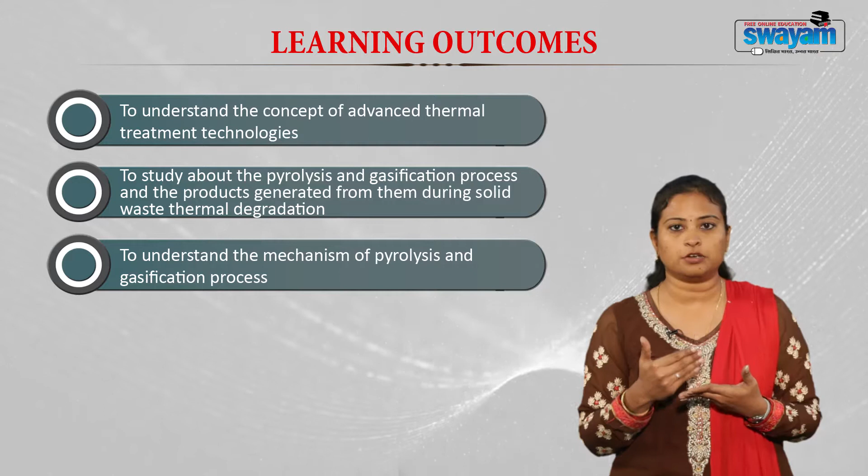We will also understand the various mechanisms of pyrolysis and gasification, study the different types of these processes and the various reactors used to perform them, and finally understand the merits and demerits of pyrolysis and gasification.

Advanced thermal treatment technologies use very high temperature to degrade or destruct waste. They are specifically designed to recover energy in the form of heat or electricity and other end products that can be used as chemical feedstock. The main purpose is to reduce the impact of residual waste on the environment.

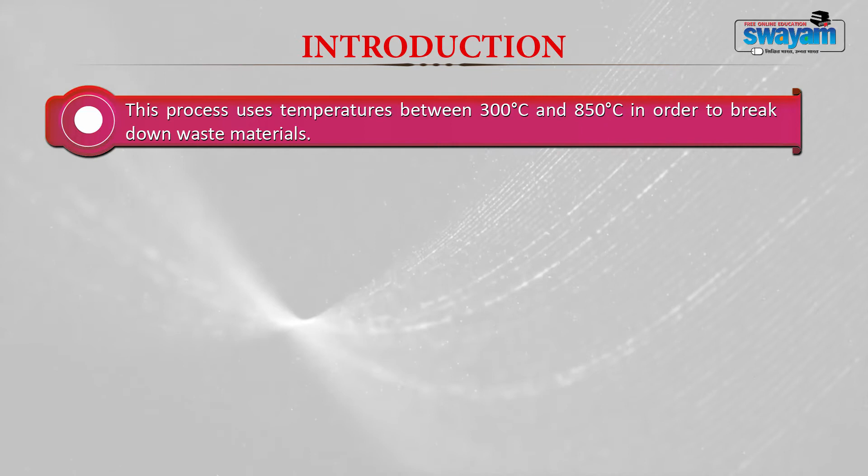Pyrolysis and gasification are examples of these advanced thermal treatment technologies. Pyrolysis is a process where waste is thermally destructed in the absence of oxygen, at a temperature of 300 to 850 degrees Celsius. Gasification is done in a limited supply of oxygen at a temperature of 900 to 1400 degrees Celsius.

Pyrolysis results in the production of three compounds: solid, liquid, and gases - solid char, liquid oil, and gases like carbon monoxide, hydrogen, and carbon dioxide. Likewise, gasification results in the production of syngas, which is carbon monoxide and hydrogen, and tar and other fertilizer value products.

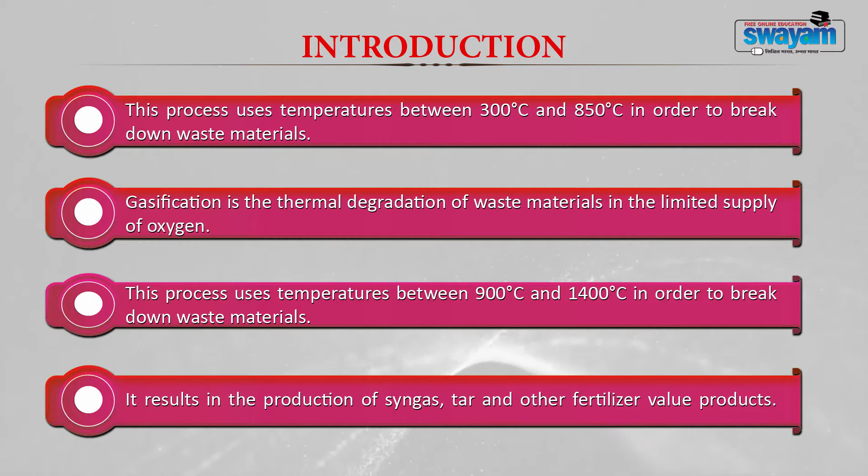Let us discuss pyrolysis in detail. In pyrolysis, organic waste is thermally destructed in the absence of oxygen. Oxygen is the thing that differentiates pyrolysis from other processes like combustion and gasification. Combustion is done in the presence of oxygen, gasification in limited supply of oxygen, and pyrolysis in the absence of oxygen.

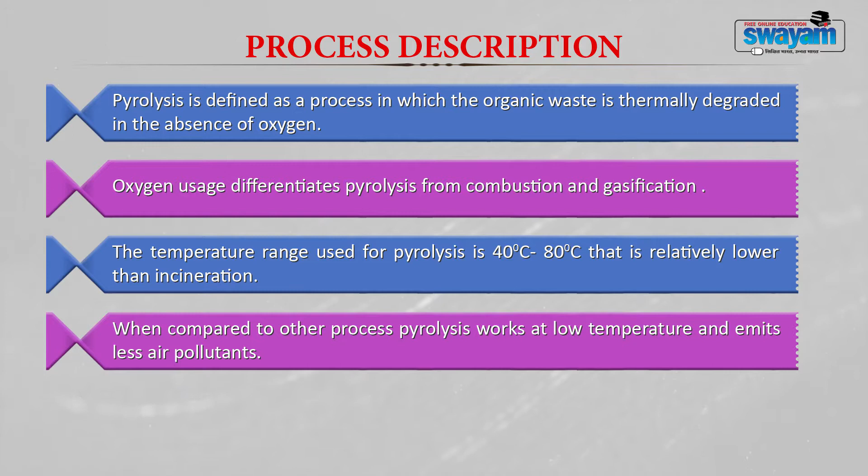The temperature range varies from 400 to 800 degrees Celsius. This is comparatively lower than incineration, and since pyrolysis is operated at low temperature, this results in less emission of air pollutants. It also produces products like char, a solid product, oil, a liquid product, and certain combustible gases.

Pyrolysis is a flexible process with the ability to produce solid, liquid, and gaseous products, and the level or quantity of these products depends upon the temperature and heating rate. It transforms low energy density waste to biofuels of high energy density and high value chemicals. The end products obtained are explored for fuel applications, as chemical feedstock, and for other energy extraction processes.

The mechanism involved is very simple. Complex materials like paper, plastic, metal, glass, cardboard, leaf litter, and other biodegradable and hazardous chemicals are heated at very high temperature. At this temperature, complex polymeric organic molecules like cellulose, hemicellulose, and lignin break down and get converted into short chain molecules. Further exposure to heat breaks these short chain molecules into oils and other gases.

Now, let us discuss about what are the different products that are produced during pyrolysis, at what condition they are produced, where they are used, and what are its applications and significance.

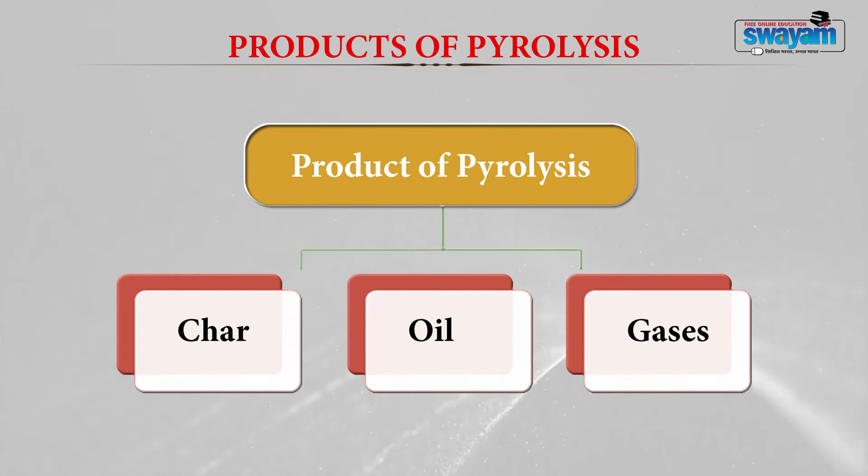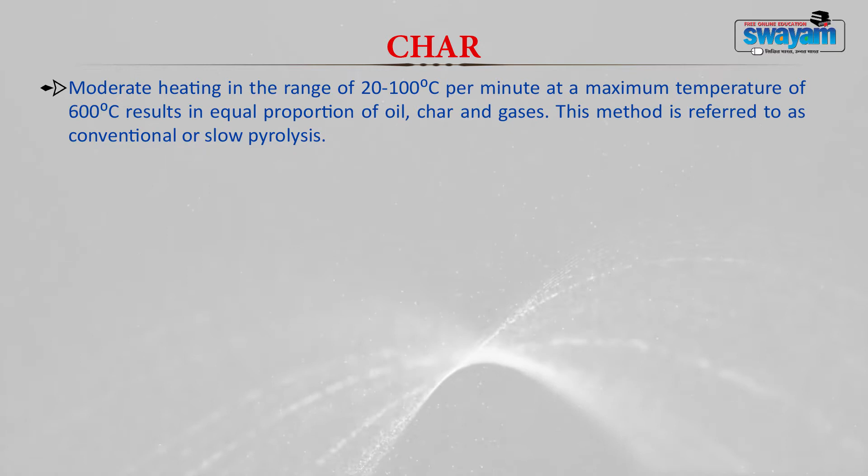Char is a solid end product of pyrolysis. Char production can be maximized at low temperature and a slow heating rate, and it depends upon the pyrolysis process condition. Moderate heating in the range of 20 to 100 degrees Celsius per minute at a maximum temperature of 600 degrees Celsius results in equal proportions of oil, char and gas. This method is generally referred to as conventional or slow pyrolysis.

The solid char that is produced from slow pyrolysis can be used as charcoal. Char formation is generally reduced in the flash pyrolysis process.

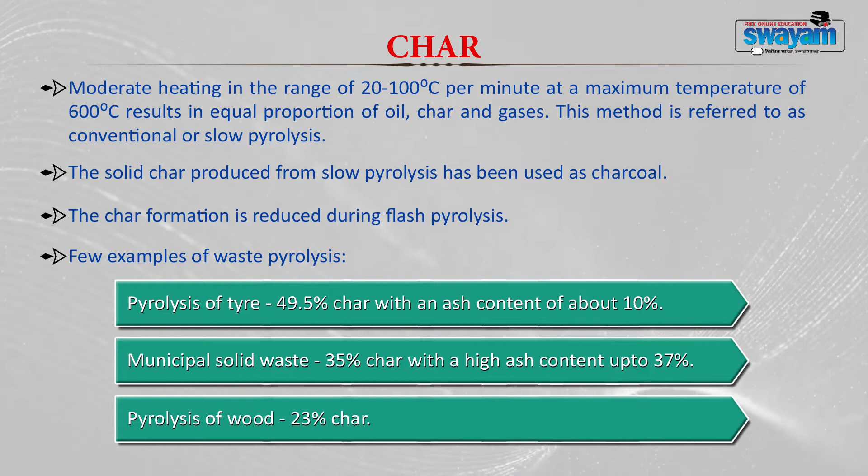Examples of char production during pyrolysis include the pyrolysis of tire, which results in 49.5% char production with an ash content of 10%. Municipal solid waste produces 35% char with a high ash content of up to 37%. Likewise, the pyrolysis of wood results in 23% char production.

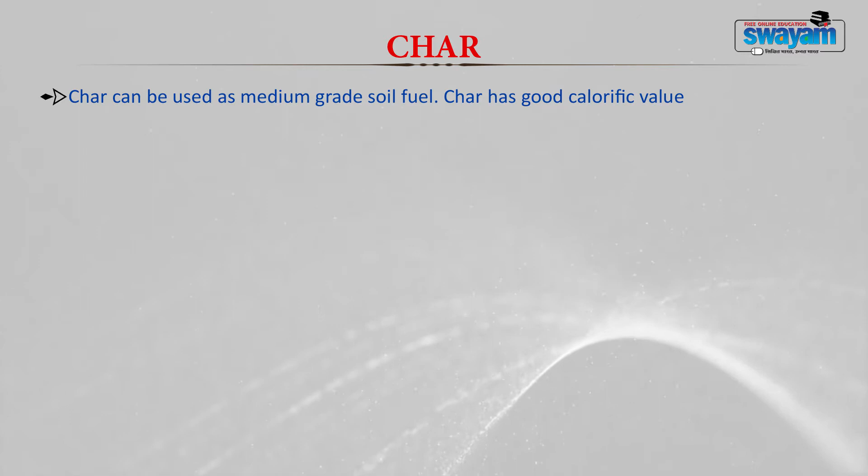Char can be used as a medium grade solid fuel, as it has a good calorific value. Some examples: char generated from municipal solid waste contains around 19 megajoules per kg calorific value. Likewise, tire char contains a calorific value of 29 megajoules per kg and wood char contains 33 megajoules per kg.

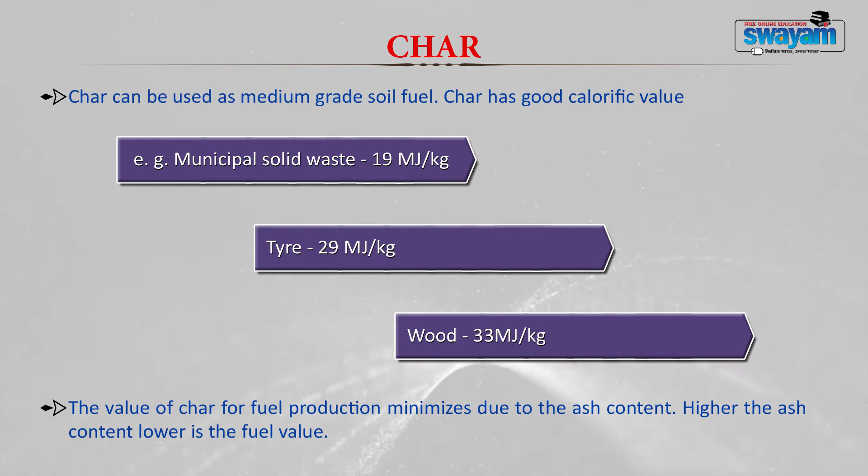Generally, the value of char for fuel production is minimized due to the ash content present in the product at the end of pyrolysis. Higher the ash content, lower will be the fuel value. So generally what you have to do is de-ashing before using it for fuel purposes.

The next product produced during the pyrolysis process is oil. The oil generated from the pyrolysis process contains a high energy density per unit weight. It can be used as a fuel with certain modification. Generally what they do is combine or mix it with petroleum refinery stock and upgrade the quality using certain catalysts. The calorific value of oil generated from municipal solid waste ranges from 25 to 40 megajoules per kg.

The composition of oil is very complex and contains a wide variety of chemicals ranging from organic acids, phenols, alcohols, aldehydes, ketones, furans, etc.

Maximum amount of oil production can be obtained by flash pyrolysis. If you talk about char, slow pyrolysis results in maximum char production and flash pyrolysis results in reduced char production. So maximum oil production can be obtained by the flash pyrolysis process.

Now let us see the applications of this oil. The oil derived from the pyrolysis of municipal solid waste cannot be used directly as a fuel because of the presence of solid char particles, viscosity and acidity. So you have to refine it before use.

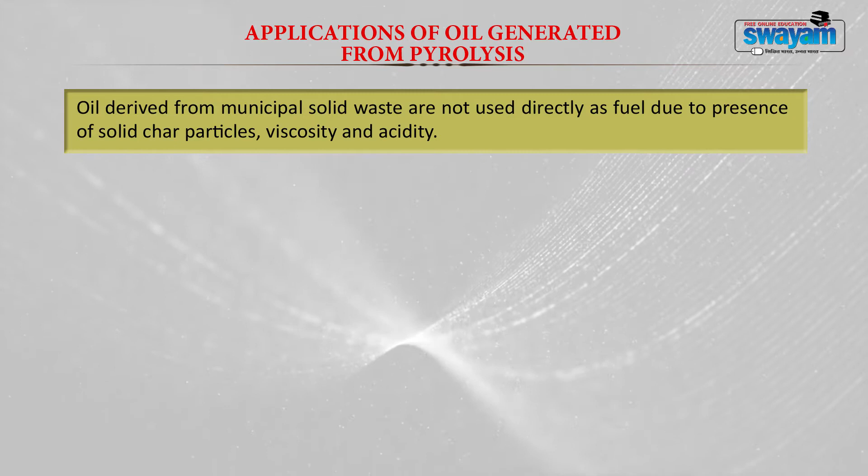So the pyrolysis oil is generally used as a chemical feedstock, meaning it acts like a raw material for the production of other products.

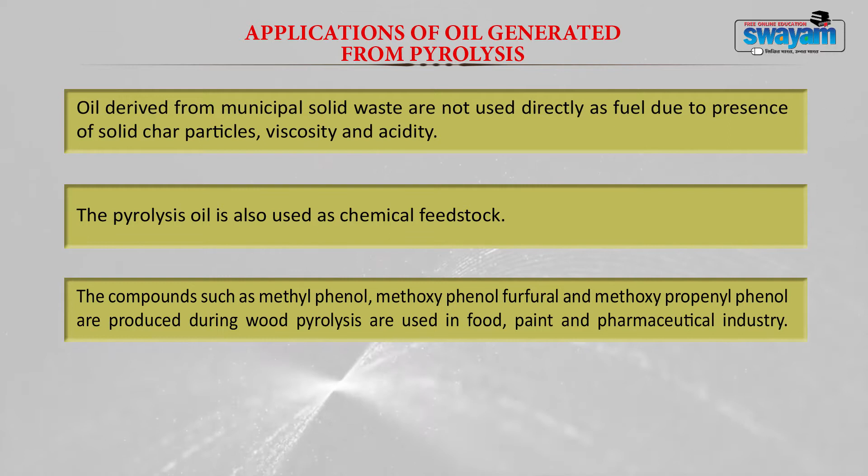Compounds like methyl phenol, methoxyphenol, furfural, and methoxypropenyl phenol are produced during wood pyrolysis. They can be used in the food, paint and pharmaceutical industries.

Likewise, the oil generated during tire pyrolysis contains DL-limonene. It can be used as a solvent and adhesive in certain industries. It also replaces chlorofluorocarbon and can be used as a cleaning agent for electronic circuit boards.

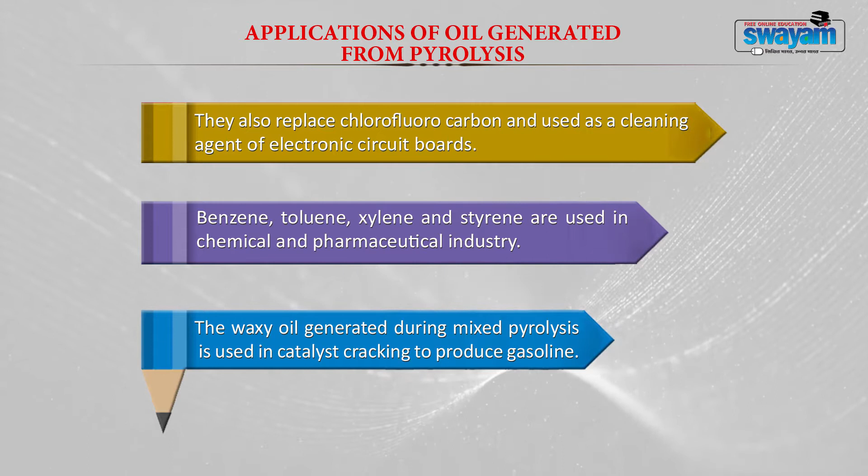Benzene, toluene, xylene and styrene produced can be used in the chemical and pharmaceutical industry. Likewise, the waxy oil generated during mixed pyrolysis can be used in catalytic cracking to produce gasoline.

The third product produced during the pyrolysis process is gases. The gas generated during pyrolysis is composed of hydrogen, carbon monoxide, carbon dioxide, methane, and certain hydrocarbon gases. High levels of carbon dioxide and carbon monoxide are due to the presence of cellulose, hemicellulose and lignin in the waste material.

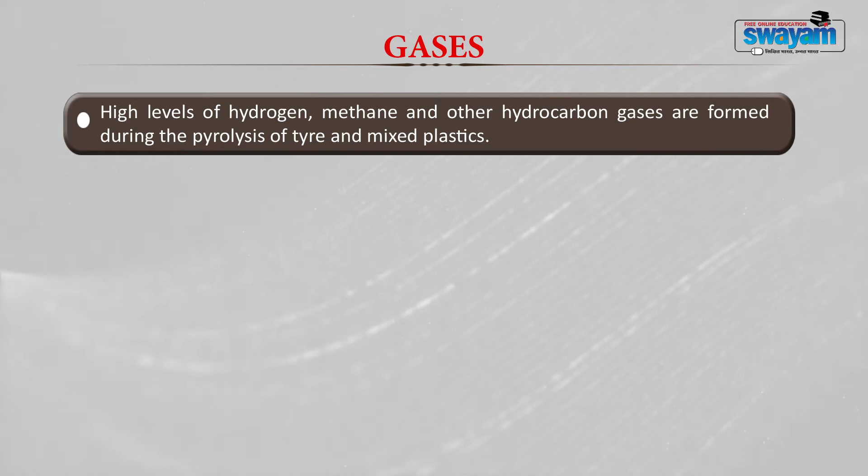High levels of hydrogen, methane and other hydrocarbon gases are formed during the pyrolysis of tire and mixed plastics. These gases generally have medium to high calorific value.

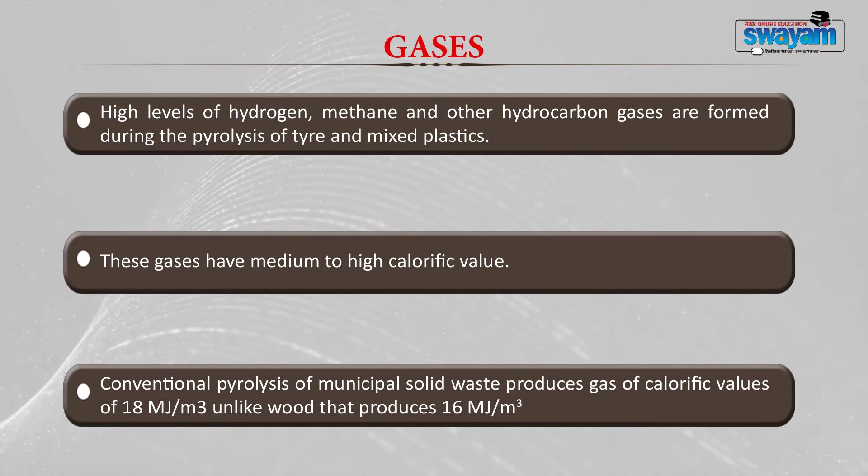Conventional pyrolysis of municipal solid waste produces gas with a calorific value of 18 megajoules per cubic meter, unlike wood which produces 16 megajoules per cubic meter of gas. High heating rate and temperature breaks down the pyrolysis oil to gas. So a maximum calorific value of 40 megajoules per cubic meter is observed in gas produced during tire pyrolysis.

Higher gas yields are generally found in pyrolysis processes where the products are kept or exposed to a hot zone for a long period of time. The gas yield is higher even at temperatures above 750 degrees Celsius.

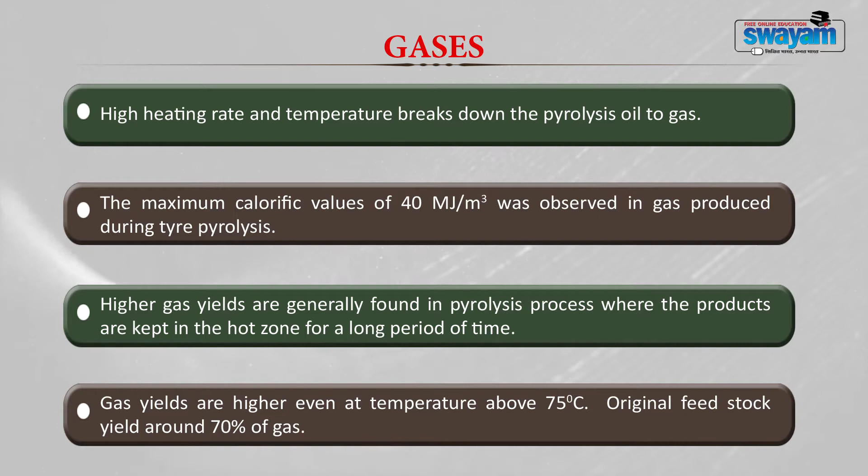Now, let us discuss the various types of pyrolysis process. As I told you earlier, you have slow pyrolysis, flash pyrolysis, and vacuum pyrolysis.

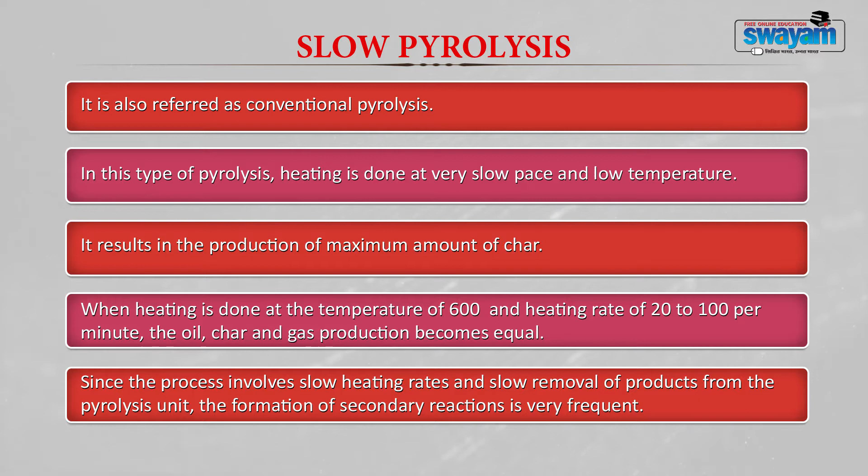The first one is slow pyrolysis, also referred to as conventional pyrolysis process. In this type, heating is done at a very slow pace and low temperature, resulting in the production of maximum amount of char. When heating is done at a temperature of 600 degrees Celsius and at a heating rate of 20 to 100 degrees Celsius per minute, the oil, char and gas production becomes equal. So under a slow pyrolysis process, you can achieve equal amounts of oil, char and gas. Since it involves a very slow heating rate and slow removal of products from the pyrolysis unit, the formation of secondary reactions are more frequent.

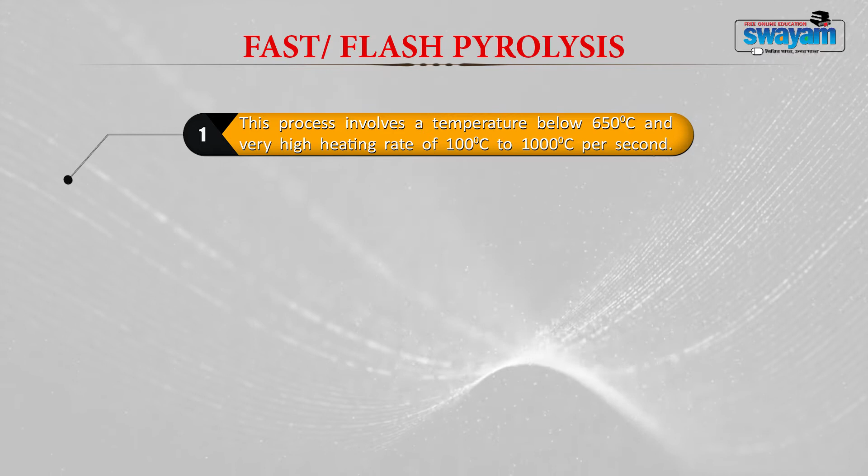The next type of pyrolysis process is your fast or flash pyrolysis. Here, it involves a temperature below 650 degrees Celsius, but a very high heating rate of about 100 to 1000 degrees Celsius per second. The process results in a maximum liquid yield of 70% with a minimum amount of char and gas. The gas production is minimized due to rapid quenching of liquid generated during the pyrolysis process. Also, high reaction rate minimizes the char formation. Wood and tire are examples of waste that can be pyrolyzed through the flash pyrolysis process.

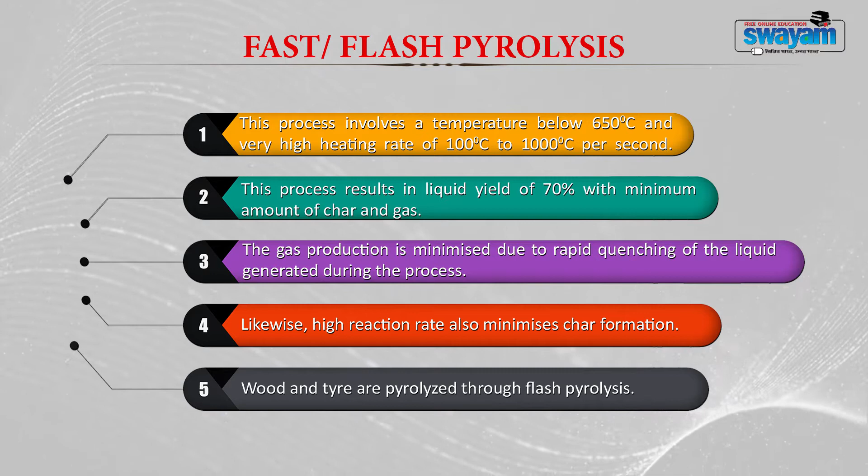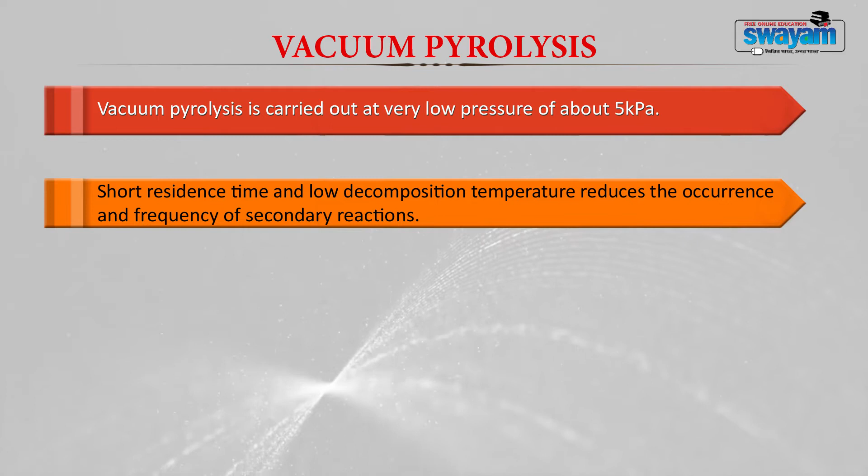The next type is your vacuum pyrolysis. Vacuum pyrolysis is generally conducted at a low pressure of about 5 kilopascals. Short residence time and low decomposition temperature generally avoid or reduce the frequency of secondary reaction formation. Vacuum pyrolysis can be done for different types of waste like household waste, wood, plastic, tire, circuit boards and so on. This type of pyrolysis, however, is not common among other types.

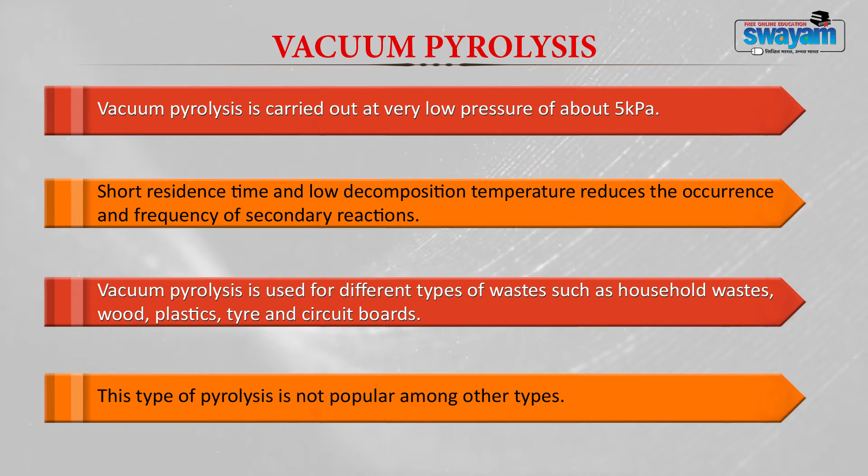Now, let us discuss the different types of pyrolysis reactors. The first type is a fixed bed reactor. It is one of the simplest reactors, very easy to construct. It is generally made up of stainless steel, heated externally through an electric furnace, and inside you flush in nitrogen or argon gas to maintain inert condition, because pyrolysis works under absence of oxygen. The waste is placed at the bottom and then subjected to heat. Fixed bed reactors work under the principle of slow pyrolysis, where the heating is done at a very slow pace.

The drawbacks of the fixed bed reactor are: lack of uniform heating due to non-movement of waste within the reactor. There is absolutely no mixing, so you cannot expect a uniform distribution of heat throughout the pyrolysis unit. Fixed bed reactors can be used for large scale application, provided you provide certain measures for uniform distribution of heat throughout the unit through certain pipelines. The gases generated during the process can be collected every day, while the char can be collected at the end of the process.

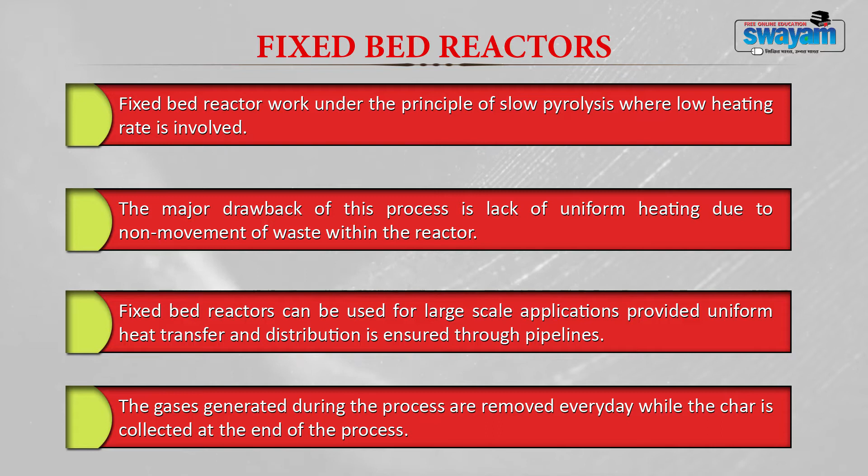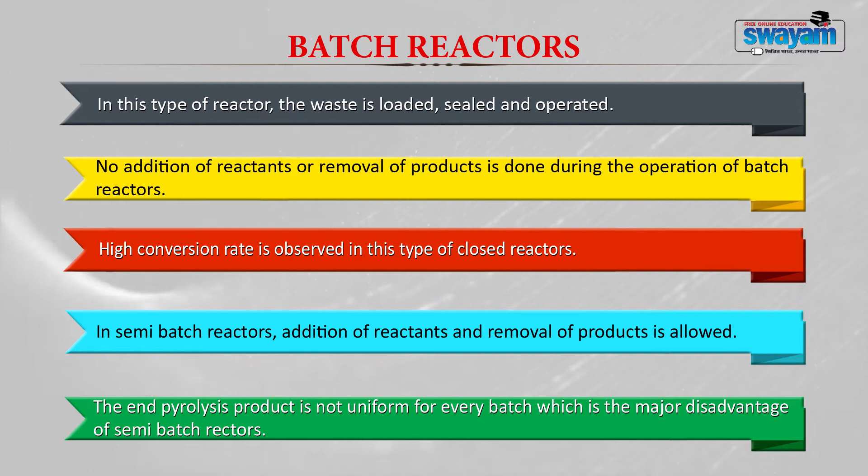The second type of reactor is your batch reactor. In this type, waste is just loaded into the unit, sealed and operated. Neither do you add any reactant nor remove any product during the operation of batch reactors. Here, high conversion rate is observed because the reactor is closed and sealed. However, in semi-batch reactors, addition of reactants and removal of products is generally allowed. The end pyrolysis product is not uniform for every batch. For example, if you operate the unit in the first batch, you can receive certain products, but the quantity or composition of product will not be the same for the next batch you operate. So that becomes a major disadvantage.

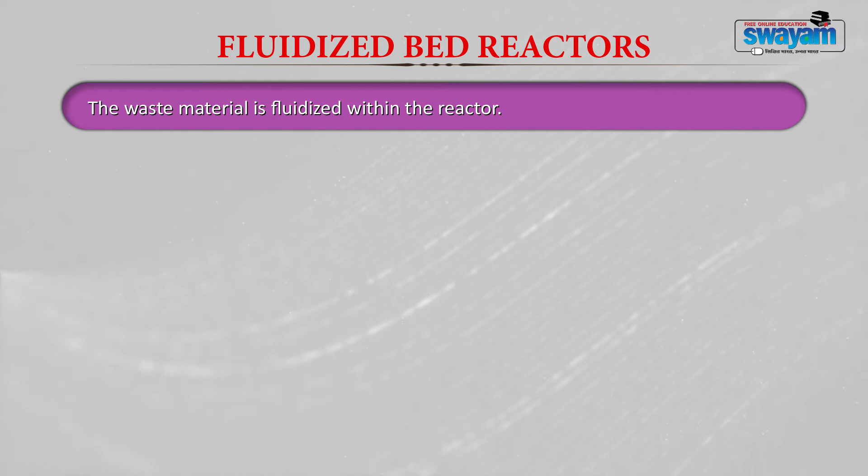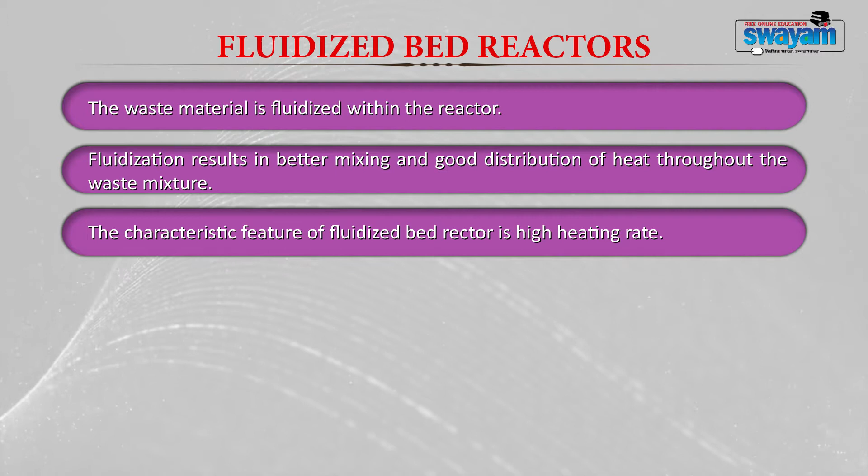The third type of reactor is your fluidized bed reactor. Here, the waste material is fluidized within the reactor, meaning it is just bubbled, moving up and down inside the reactor. So fluidization generally results in good mixing and proper distribution of heat within the waste mixture. The characteristic feature of the fluidized bed reactor is a high heating rate, it retains heat for a long period of time, and distributes it uniformly throughout the unit. It works under the principle of flash pyrolysis, resulting in the generation of maximum amount of oil, around 70%. Municipal solid waste, especially polymers and plastics, are pyrolyzed in fluidized bed reactors. Polymers generally possess low thermal conductivity and high viscosity as their characteristic, so fluidized bed reactors are optimum for those. High heating efficiency and high heat distribution in fluidized bed reactors generally facilitate the cracking of these polymers.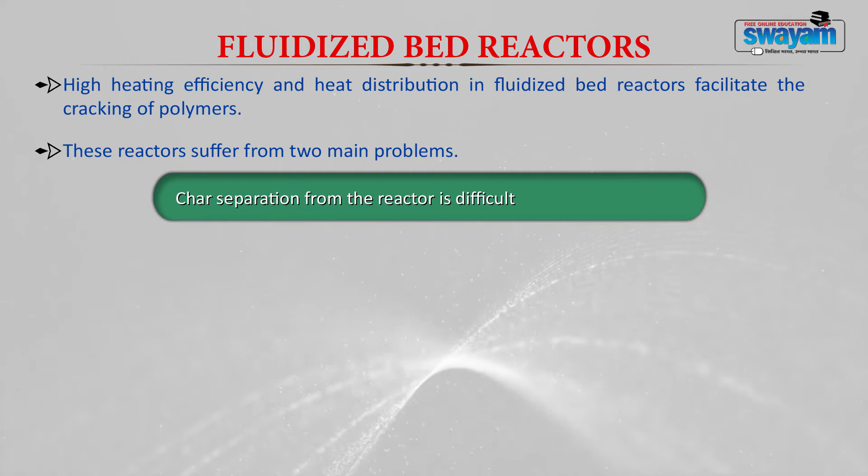But these reactors generally suffer from two main problems. One, the char separation from the reactor is very difficult, and better fluidization is achieved only if the particle size is smaller. So the waste requires certain pre-treatment before being subjected to a fluidized bed reactor.

So what you have to do is, after collection, the material should be sorted, dried, crushed or shredded into small pieces and then loaded into the reactor for the pyrolysis process. Plastics and paper can be shredded or cut into a size of 5 mm, and biomass can be reduced to a size of 1 centimeter.

Now, the fluidized bed reactors are very difficult to scale up, and hence they have a limited application only in the laboratories. Now, let us look into the advantages of the pyrolysis process.

Now, pyrolysis process is used for degrading biodegradable waste and plastics using high temperature. Here you can recover energy in the form of heat or electricity. When compared to mass burning, energy and other value added products are recovered by advanced thermal treatment processes like pyrolysis.

Now, the high temperature involved in pyrolysis generally will kill all the pathogens and harmful organisms present in the solid waste. Also, it will reduce the water content of your final product.

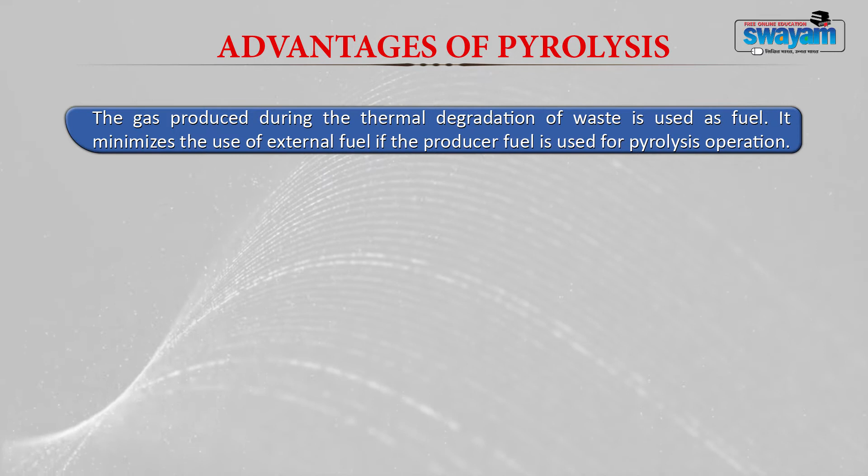The gas that is produced during the thermal degradation process can be used as a fuel. If you use them as a fuel, it minimizes the load on the use of external fuel, if the producer fuel is used for pyrolysis.

Then the biochar, the char that is produced during the pyrolysis process, can be used as a soil amendment or as activated carbon. Biochar is reported to sequester carbon and increase the fertility of soil. This again becomes an added advantage of the pyrolysis process.

The bio oil that is produced can be combusted either directly in boilers and engines. Also, this process degrades even complex pollutants into simpler ones.

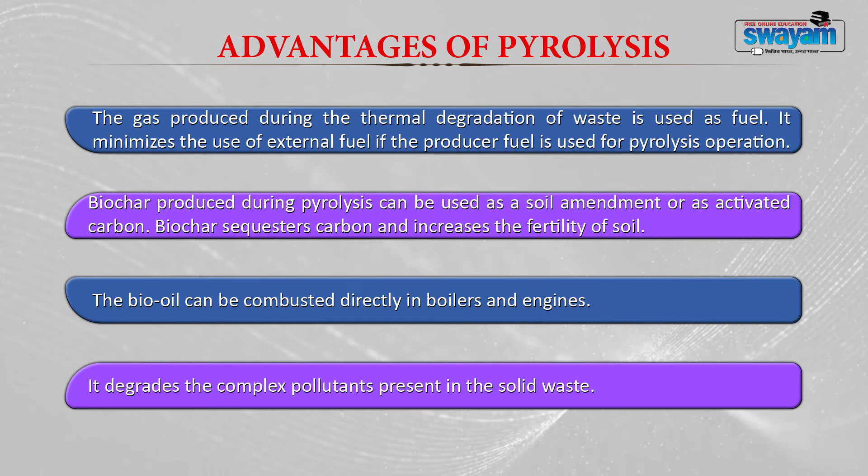Then it favors recycling of mixed plastics and soiled plastics which cannot be taken for the recycling process. This you can achieve in the pyrolysis process. Which means only plastics which have certain strength or thickness can be recycled.

So other plastics like poly bags or soiled plastics used in agricultural mulch, silage or greenhouse films, they can be recovered or destroyed in the pyrolysis unit.

Now, the pyrolysis unit again minimizes the volume of waste, and the amount of residual waste that is sent to the landfill is very, very less.

The pyrolysis plants are very flexible because they are modular in nature, and you can fix them at any point and perform the process. Even you can fix it at the source of generation, in the transfer station, or even at the disposal site. The number of pyrolysis units can also be added or reduced according to the requirement of a society or community. Also, these units are very easy to build.

Moreover, since pyrolysis units work under very low temperature, the air pollution emission levels are very less, unlike your incineration process.

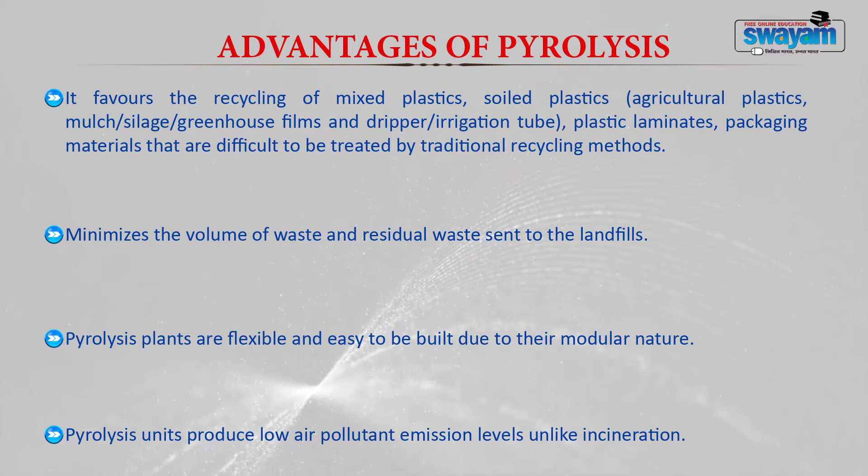Now, let us discuss the disadvantages of the pyrolysis process. Pyrolysis can be used only for residual waste, failing which it will undermine the advantages of recycling and the composting process. Second, feedstock of pyrolysis generally needs pre-treatment or pre-processing before being subjected to the pyrolysis process.

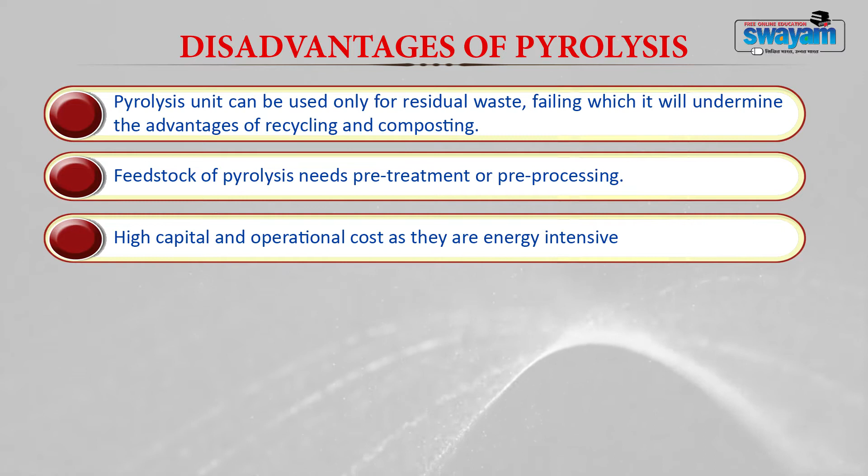High capital and operational cost. Pyrolysis process involves high capital and operation cost because they are very energy intensive, since it involves a very high temperature. Then it requires skilled operators for operating the unit.

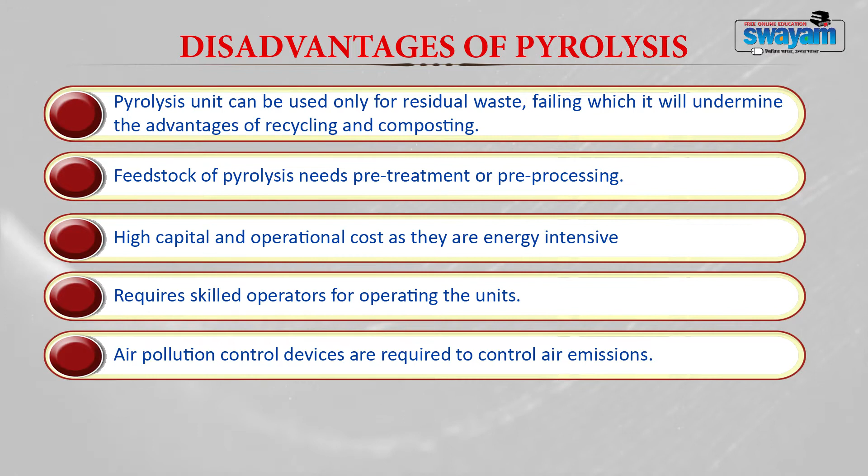Now, though it emits less air pollution, control devices need to be installed in the pyrolysis unit. The ash that is generated during the thermal degradation may contain certain heavy metals and would require safe disposal.

With this, let us look into the process description of the gasification process. Now, gasification is a process by which solid or liquid waste material is converted, by the action of heat, into a gaseous material, ash and tar, in the limited supply of oxygen.

It is a unique process in which the carbon present in the municipal solid waste is converted into energy without burning them.

The gases generated during the process are carbon monoxide and hydrogen. They are generally termed syngas. Other gases like carbon dioxide and methane are also produced.

Gasification is done at a temperature of 800 to 1400 degrees Celsius, and air, pure oxygen and steam can be used as an agent for performing the gasification process.

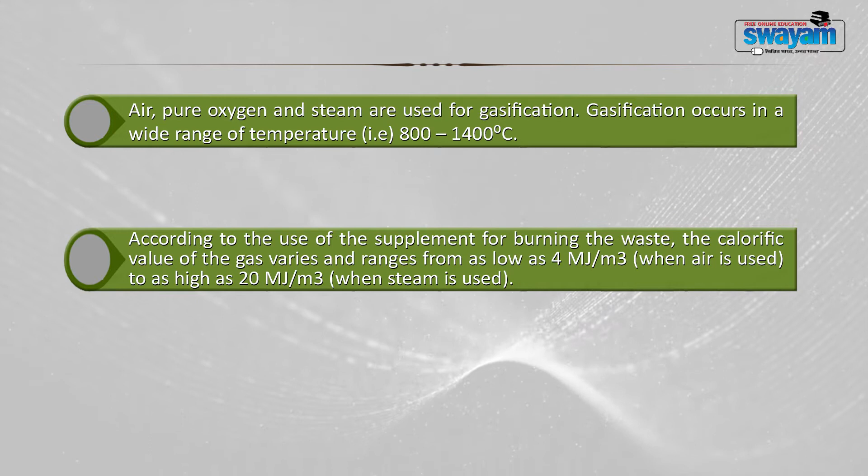According to the use of supplementing agent for burning the waste, the calorific value of the gas also keeps changing, from a low calorific value of 4 megajoules per meter cube to 20 megajoules per meter cube. That is, when air is used, the calorific value is low, and when steam is used, the calorific value is as high as 20 megajoules per meter cube.

The calorific value of the gases produced during the gasification process is comparatively low when compared with natural gas, which has a calorific value of 37 megajoules per meter cube.

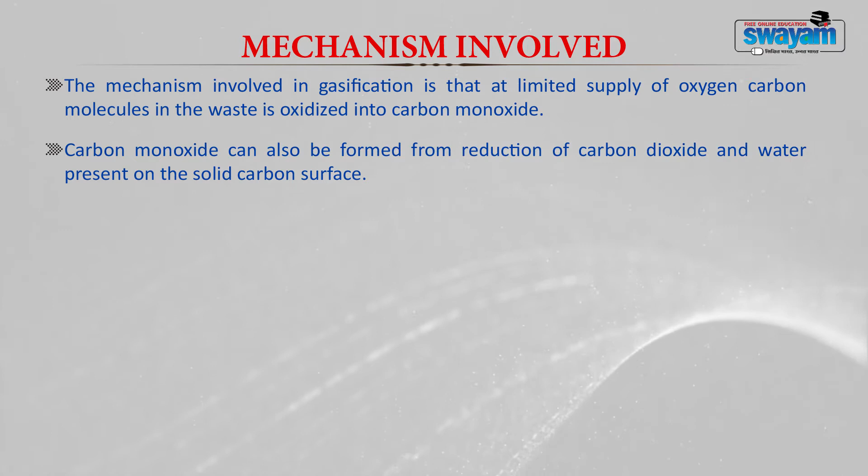Now let us discuss the mechanism involved in the gasification process. During limited supply of oxygen, carbon molecules present in the waste are oxidized into carbon monoxide. Carbon monoxide can also be formed by the reduction of carbon dioxide and water present on the solid carbon surface.

Gasification is always preceded by pyrolysis, and hence char-like organic material can be used as feed for the gasification process. What I mean is pyrolysis can be done first, and the char produced can be further subjected to gasification to result in the production of syngas.

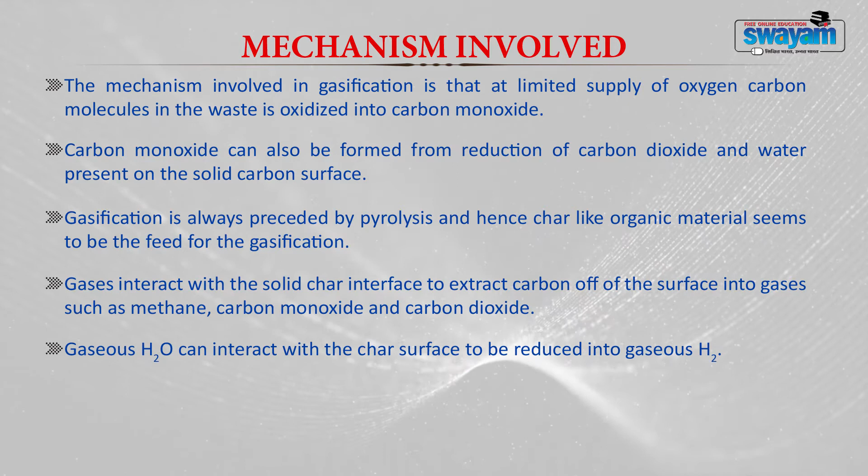Gases generally interact with the solid char interface to extract carbon from the surface into gases such as methane, carbon monoxide and carbon dioxide. Gaseous water can interact with the char surface to be reduced into gaseous hydrogen.

Carbon combines with half a molecule of oxygen to provide carbon monoxide, and carbon monoxide can also be formed from carbon dioxide. Carbon combines with carbon dioxide to form two molecules of carbon monoxide. Then the water vapor can combine with carbon to produce carbon monoxide and H2 gas. When put together, they are called syngas.

Now let us discuss the different types of gasification process. Depending upon the agent used for performing gasification, like air, oxygen, steam or hydrogen, they are classified into different types: air gasification, oxygen gasification, steam gasification, gasification with hydrogen, thermal depolymerization, and plasma gasification.

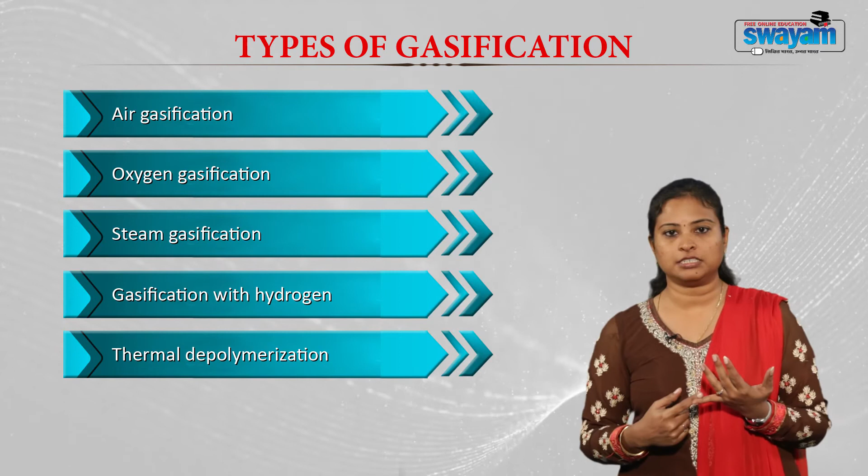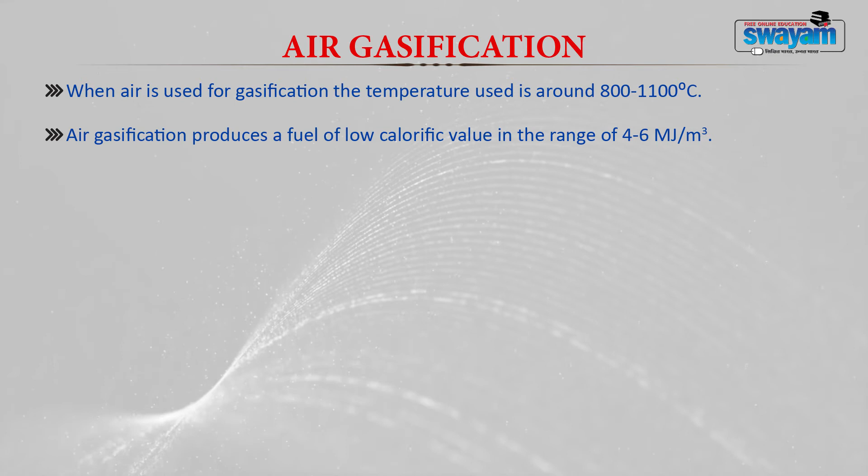Air gasification is a process where air is used for gasifying the waste material, with a temperature requirement of 800 to 1100 degrees Celsius. This generally produces a gas or fuel of low calorific value, in the range of 4 to 6 megajoules per meter cube. The moisture present in the air produces hydrogen. In addition to other gases, nitrogen also occurs as a major component along with carbon monoxide, carbon dioxide and methane. Nitrogen generally reduces the calorific value of the gas.

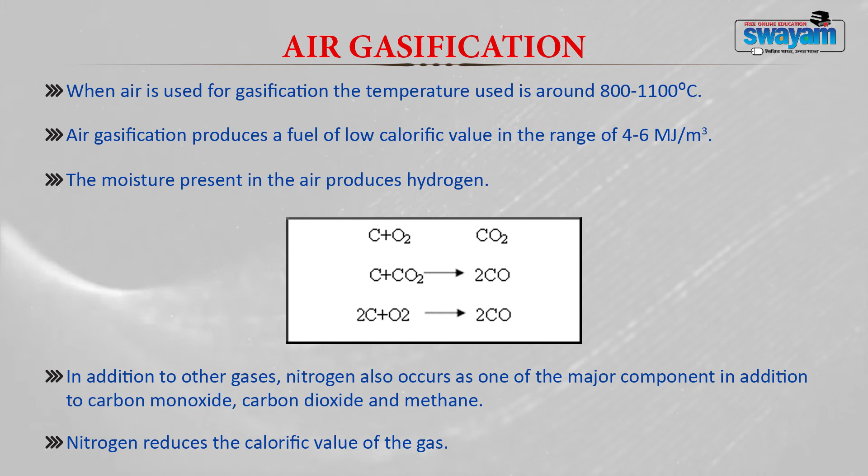The next type of gasification process is oxygen gasification. Here pure oxygen is used for gasifying the solid waste. The temperature is relatively high in this process, around 1000 to 1400 degrees Celsius. The calorific value of the fuel produced is medium, around 10 to 15 megajoules per meter cube.

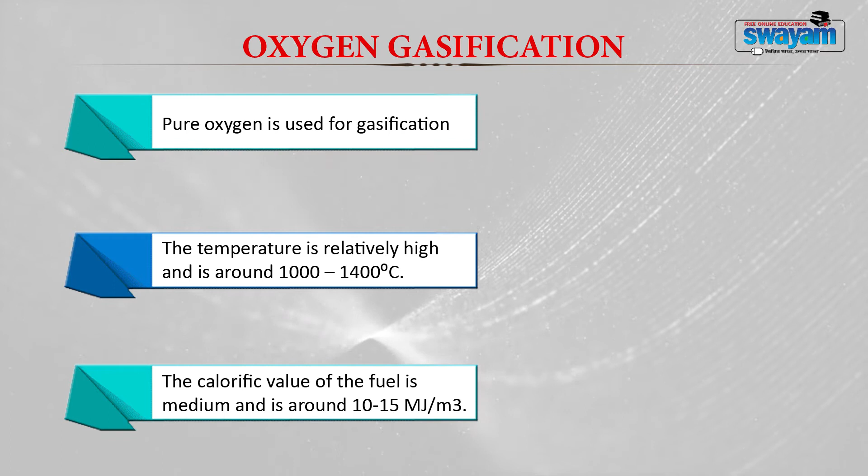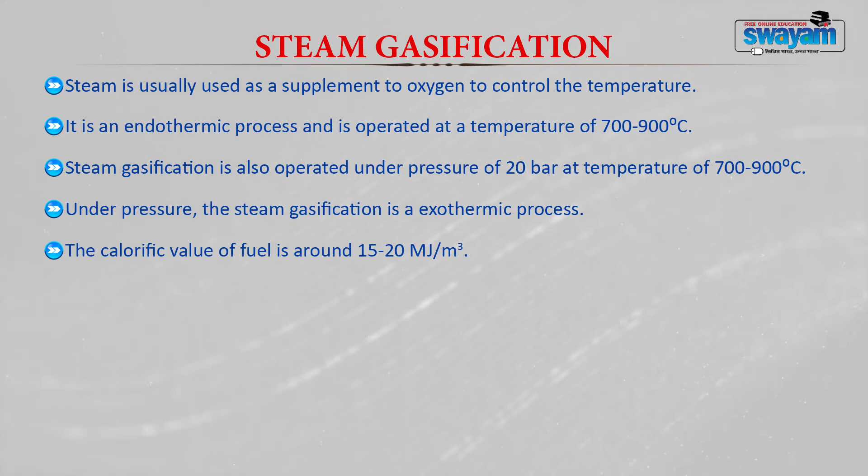Steam is usually used as a supplement to oxygen to control the temperature. It is generally an endothermic process, operated at a temperature of 700 to 900 degrees Celsius. Steam gasification is again operated at a pressure of 20 bar and a temperature of 700 to 900 degrees Celsius. Under this pressure, steam gasification becomes an exothermic process. The calorific value of fuel produced during steam gasification is around 15 to 20 megajoules per meter cube. However, under high pressure, certain additional reactions also occur.

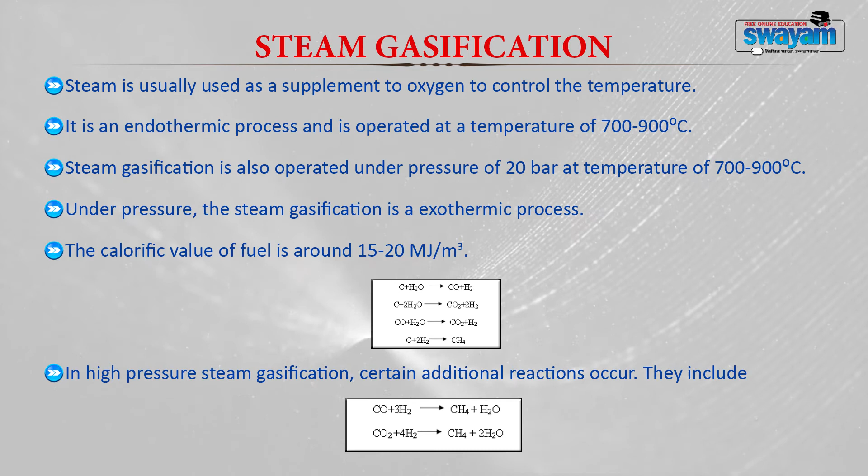The equations here depict the steam gasification process. Carbon combines with water to form carbon monoxide and hydrogen. It also produces carbon dioxide and hydrogen. Likewise, carbon monoxide combines with water to form carbon dioxide and hydrogen. Carbon also combines with hydrogen to form methane. Under high pressure conditions, certain additional reactions occur, like carbon monoxide combining with hydrogen to form methane and water, and carbon dioxide combining with hydrogen to form methane and water. So methane is another additional product produced during the steam gasification process.

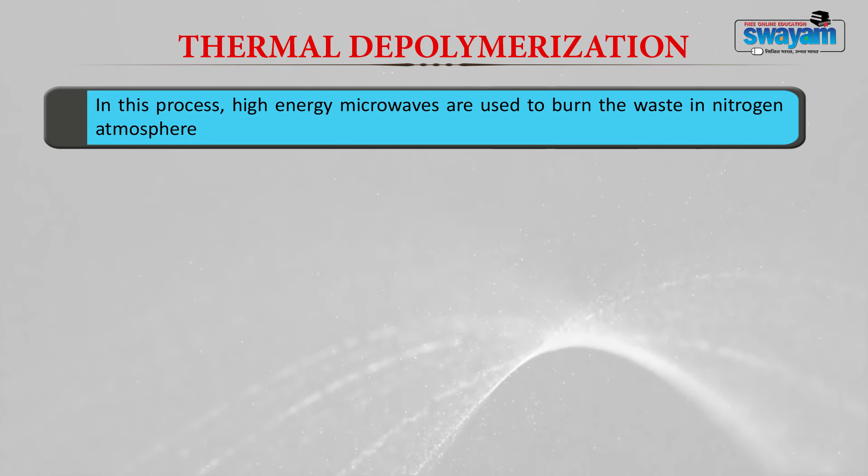The next type is thermal depolymerization, which involves very high energy microwaves to burn the waste under nitrogen or inert atmosphere. The waste absorbs the microwave and increases the internal temperature and energy of the organic material. This results in thermal decomposition of the waste. As mentioned earlier, nitrogen inhibits or reduces the calorific value of the fuel. Thermal depolymerization can also be done at a temperature of 150 to 350 degrees Celsius.

The last type of gasification process is plasma gasification, which is carried out at a very high temperature of 5500 degrees Celsius. Plasma is nothing but an ionized gas formed when an electric discharge is passed through a gas.

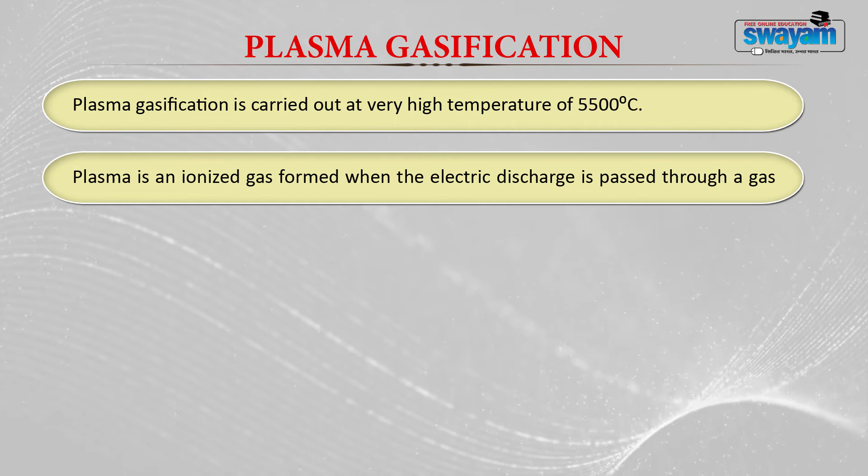In plasma, the electrical energy is converted into intense heat, that is thermal energy, and at that temperature plasma destroys even the hazardous waste. The ash generated in incinerators is destroyed or converted into non-leachable glass in the plasma gasification process. Plasma gasifiers follow the same mechanism as other gasifiers, however the rate of reaction is very fast because the temperature supplied is very high.

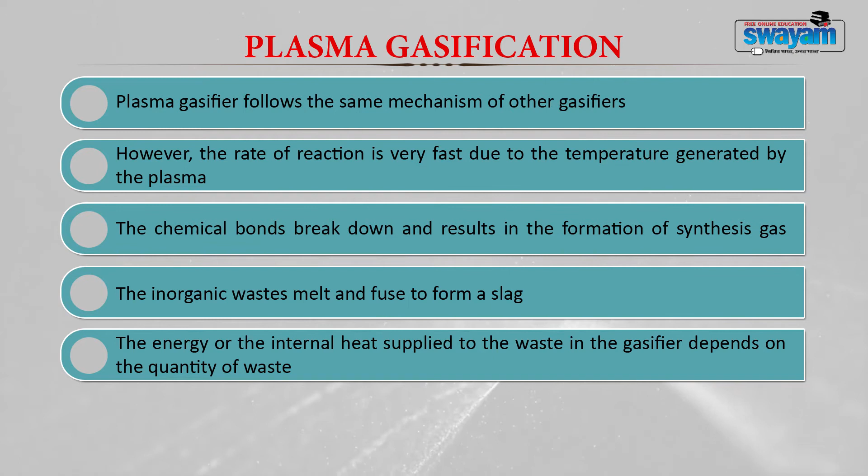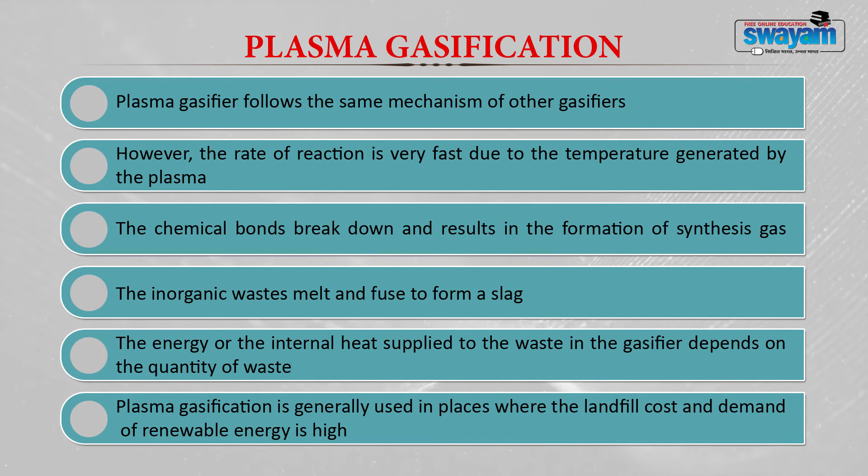The chemical bonds break and result in the formation of synthesis gas, and the inorganic waste generally melts and fuses to form a slag. The energy or internal heat supplied to the waste in the gasifier depends upon the quantity of waste subjected to the gasification process. Plasma gasification is used in places where the landfill cost is very high and the demand for renewable energy is high.

Now let us discuss the different types of gasifiers. How do you select a gasifier for burning or destroying your waste? Gasifiers are selected on the basis of the available fuel quality, capacity, and gas quality conditions. Based on that, gasifiers are classified into two types: fixed bed gasifier and fluidized bed gasifier. Usually municipal solid waste is gasified in large capacity gasifiers. Variable fuel feed, uniform process temperature, high turbulence, good interaction between gases and solids, and high carbon conversion make larger gasifiers more advantageous than smaller ones.

Now we will discuss the fixed bed gasifiers and the different types of fixed bed gasifiers. Fixed bed gasifiers are a simple and easy technology to operate. They are commonly used in small and medium scale power generation units. These gasifiers are provided with a grate to support the feed material and maintain a stationary reaction zone.

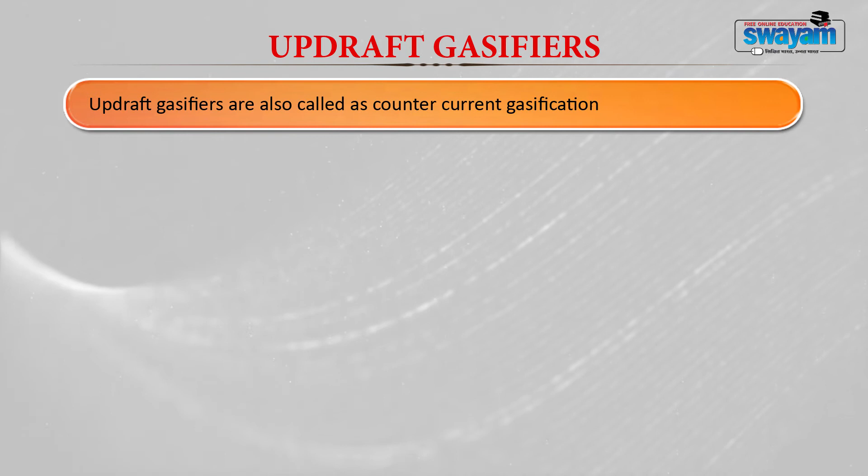The fixed bed gasifiers are of two types: updraft and downdraft gasifiers. Updraft gasifiers are also called counter current gasification processes. In this reactor, the fuel or waste is added from the top and the gasifying agent, like air, steam, or oxygen, hydrogen, is injected from the bottom. That is why it is called counter current, because the feed and the gasifying agent come in opposite directions. The syngas produced during the process leaves the reactor from the upper end of the gasifier.

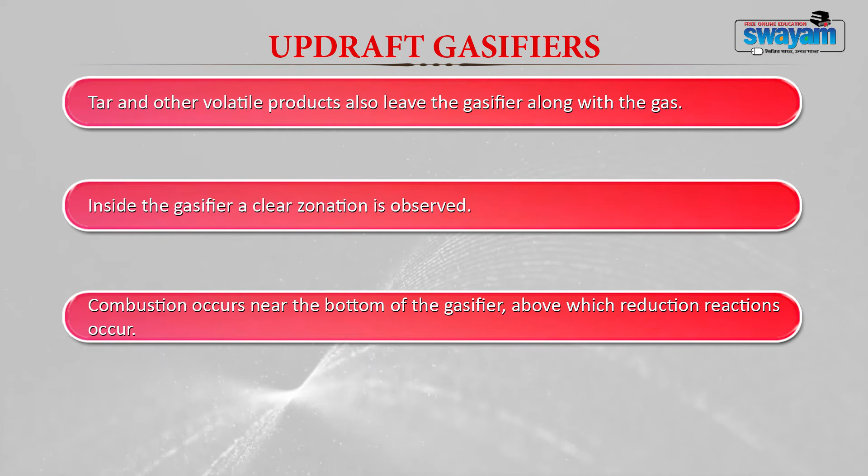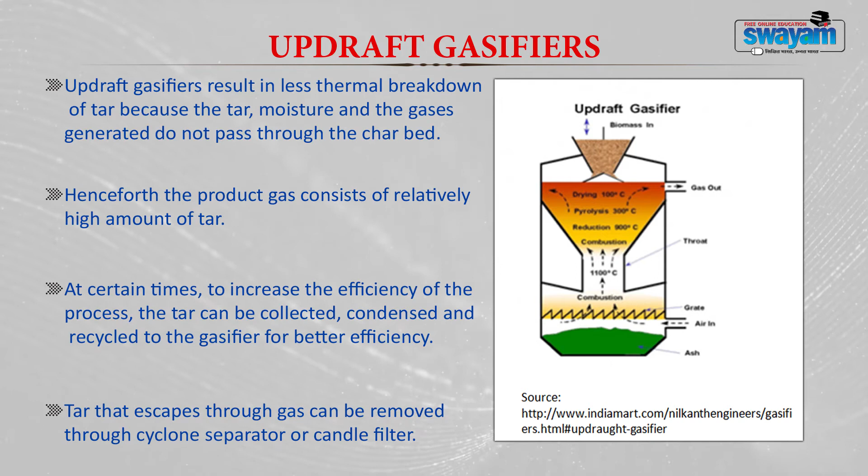Within the gasifier you can see a clear zonation, and combustion occurs especially in the bottom zone of the gasifier, above which you find a zone where reduction reactions generally occur. This image shows an updraft gasifier, where you can see clear zonation within this gasifying unit.

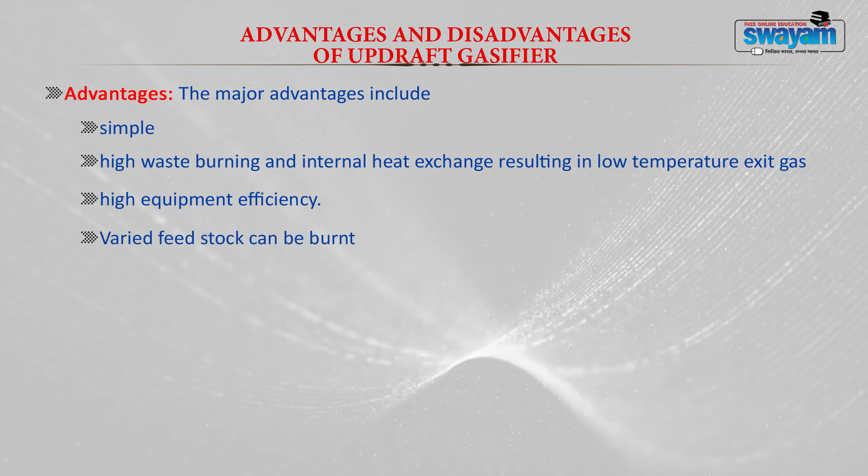Let us look into the advantages and disadvantages of an updraft gasifier. The major advantages are: they are very simple to operate; high waste burning and internal heat exchange generally results in low temperature exit gas; the updraft gasifier has high equipment efficiency; and varied types of feedstock can be burnt in an updraft gasifier. The disadvantages are: the thermal breakdown of tar is very low, they produce certain dangerous products, and they might cause explosive situations.

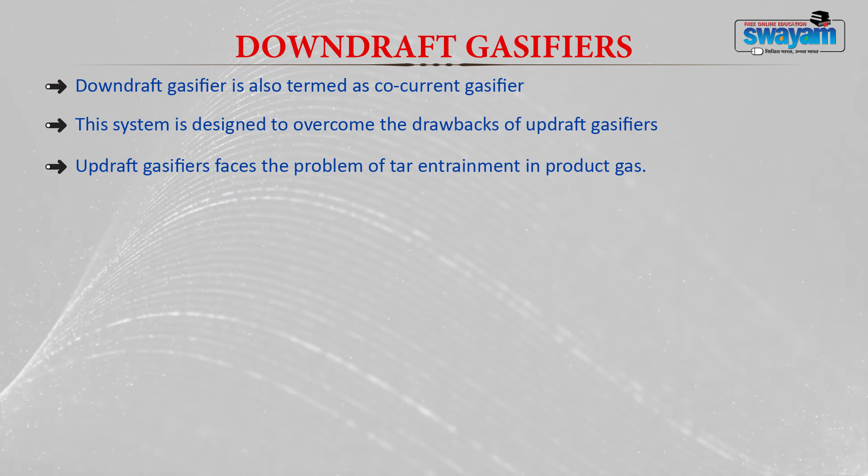Also, they require an automatic moving grate. Now, the downdraft gasifier is also termed a co-current gasifier because the waste and the gasifying agent move in the same direction. This is generally designed to overcome the drawbacks of the updraft gasifier. The updraft gasifier faces the problem of tar entrainment in the product gas, which contains a lot of tar material that needs to be purified. So to avoid this disadvantage, downdraft gasifiers were developed.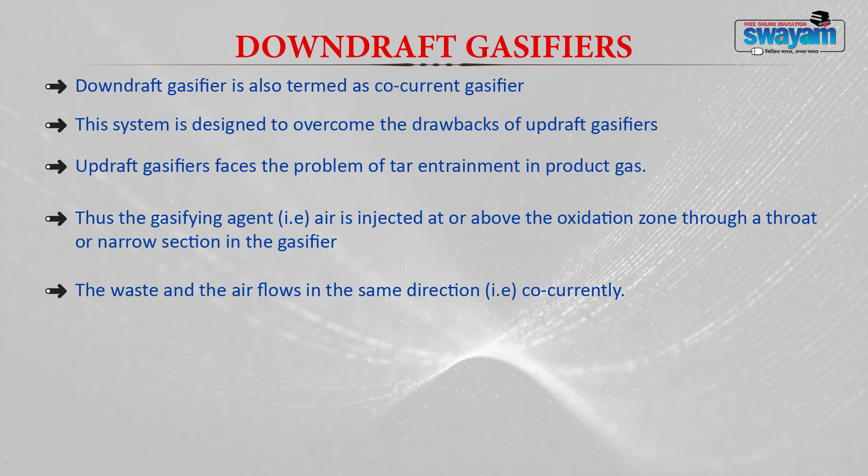The gasifying agent, like air, is injected at or above the oxidation zone through a small slit or throat inserted in the gasifier. The waste and the air flow in the same direction, co-currently, as I told you earlier. Here, the complete breakdown of tar and hydrocarbons is observed in a downdraft reactor because they move through high oxidation zones. Also, increased levels of hydrogen and light hydrocarbons are observed in these gasifiers.

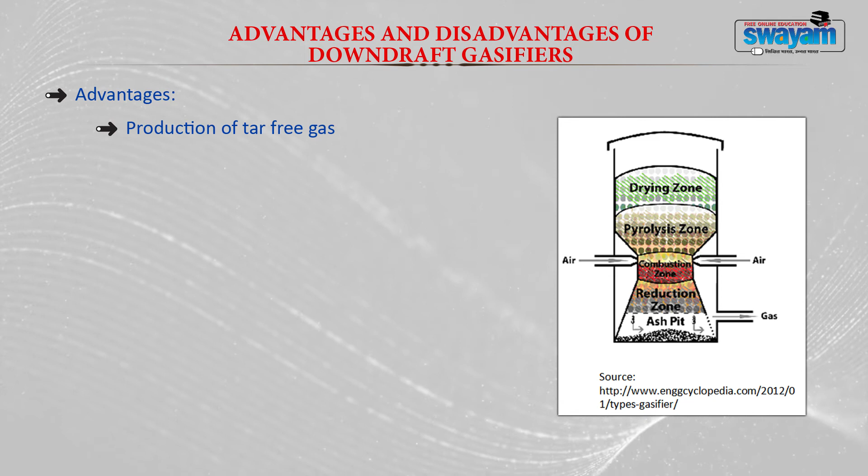The advantages of downdraft gasifiers are: production of tar-free gas, and high conversion of pyrolysis intermediates. The disadvantages are that it cannot be operated for different types of feedstocks and they are not ideal for waste treatment because they require low ash fuel. The problems of flow and pressure drop are very frequent in downdraft reactors. Also, they show lower efficiency and the product gas produced is of low calorific value.

The next type of gasifier is a fluidized bed gasifier, which consists of a bed of coarse sand or limestone. The gasifying agent is passed through this bed in an upward direction, acting like a fluidizing medium, and they oxidize the cracking of tar. Through an auger or a feed chute, the waste is generally fed at the top of the gasifier.

Now, the advantages like good mixing, efficient reaction, high heat transfer, good operational control and compactness of the chamber are some of the advantages of fluidized bed reactors. The fluidized bed gasifiers are generally used in places where the fuel generation capacity is 10 megawatt.

You can also have twin fluidized bed reactors for the gasification process, where the first reactor can be used to gasify the waste and the other can be used for combustion of char.

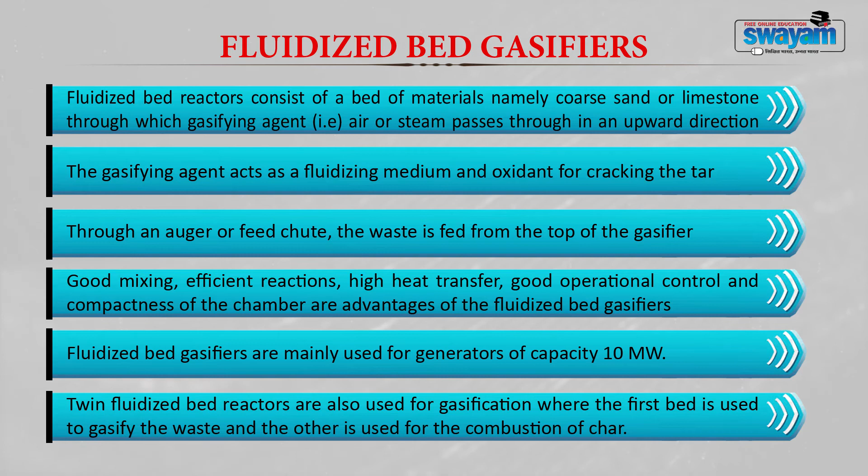Fluidized bed gasifiers are classified into two types: bubbling fluidized bed reactor and circulating fluidized bed reactor. In a bubbling fluidized bed reactor, the shape is cylindrical or rectangular, and it is operated at a temperature of 900 to 1000 degrees Celsius.

The chamber shape is designed so that contact between the gas and the solid is easy, and it facilitates easy drying and size reduction through attrition. Air or steam is injected into the chamber at high velocity to fluidize, expand, lift and bubble the bed material. During such conditions, the organic waste is vaporized by pyrolysis and then later combusted.

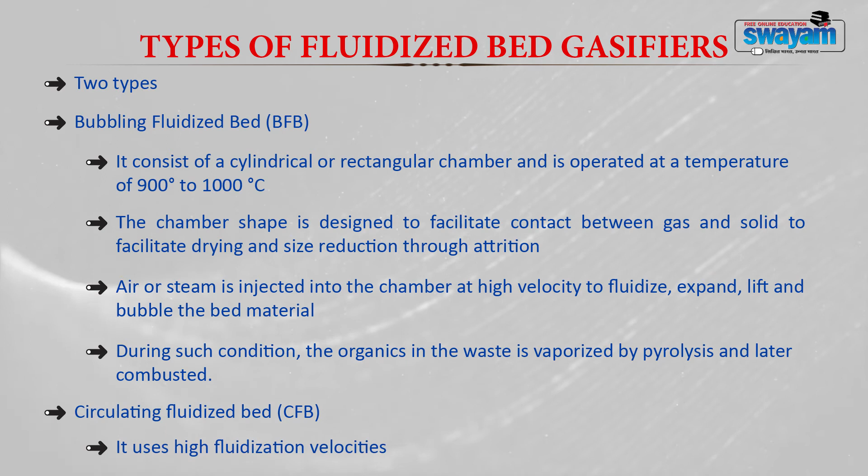The second type, the circulating fluidized bed reactor, uses a high fluidization velocity. The solids are separated and recycled back to the gasifier to improve performance. You do not find any clear distinction between the dense solid zone and dilute solid zone.

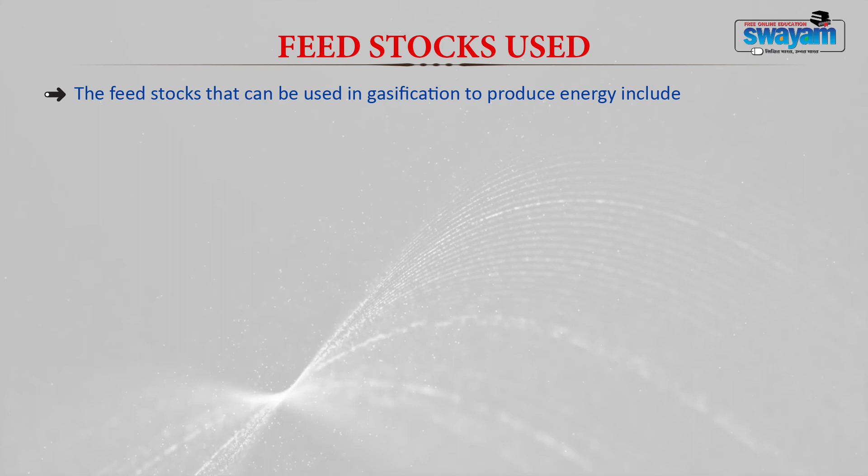Now let us look into the various feedstocks used for the gasification process. Feedstocks should be chosen so they can produce energy, like wood waste such as sawdust, twigs and bark. Agricultural waste like crop residue, corn stalks, and spoiled food grains can also be used in the gasification process.

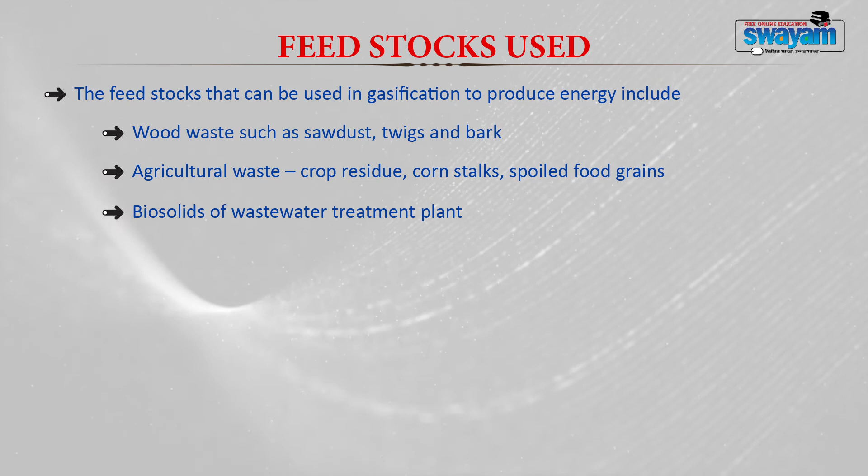The feedstock generally requires pre-processing or screening to remove recyclables and inorganic materials before being fed into the gasifier unit. Shredding of feedstock can improve the efficiency of treatment of municipal solid waste, and moisture removal also improves the efficiency of the gasifier. Thus, the waste or feedstock should generally be dried and shredded before being introduced into the gasifier.

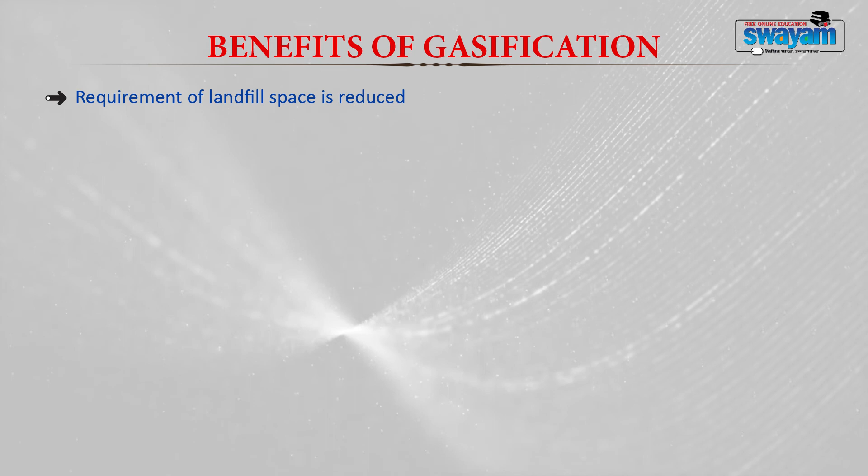Now let us look into the various benefits of the gasification process. Just like other thermal treatment processes, gasification reduces the requirement of landfill space, reduces transportation cost, and minimizes methane emissions from landfills during decomposition of waste. It also reduces the risk of contamination of water bodies.

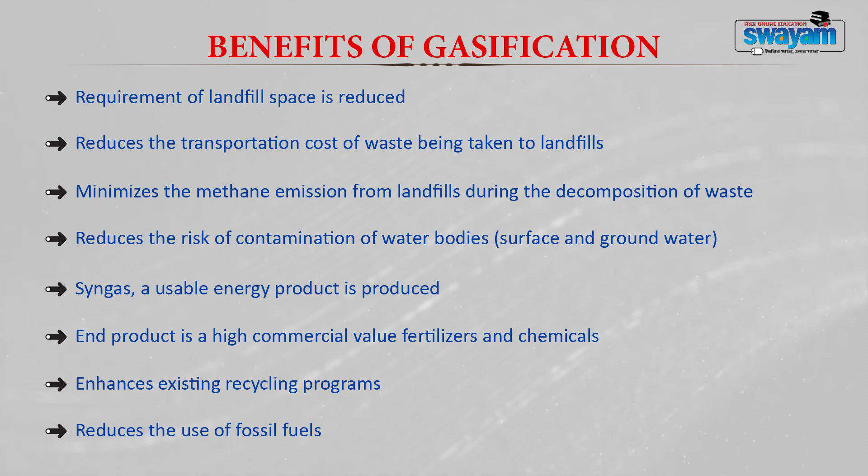The syngas produced becomes a useful energy product, and the end products produced have a high commercial value, such as fertilizers and chemicals. They also enhance existing recycling programs and reduce the use of fossil fuels. Tar, a valuable product, is also produced from the gasification process.

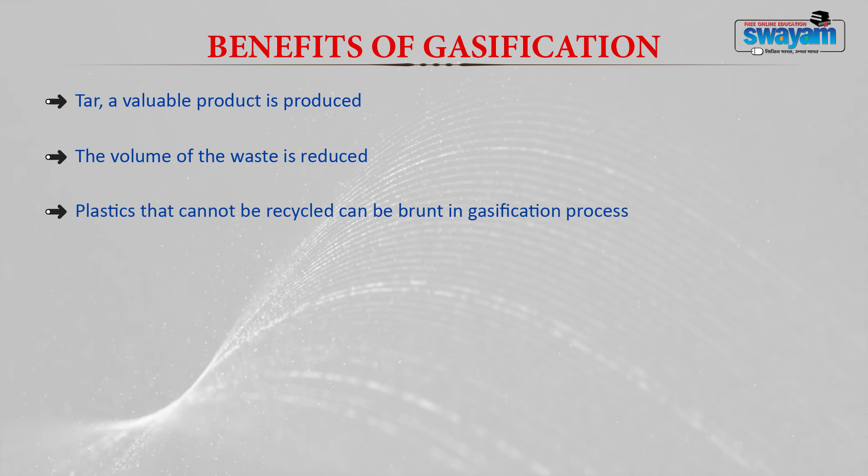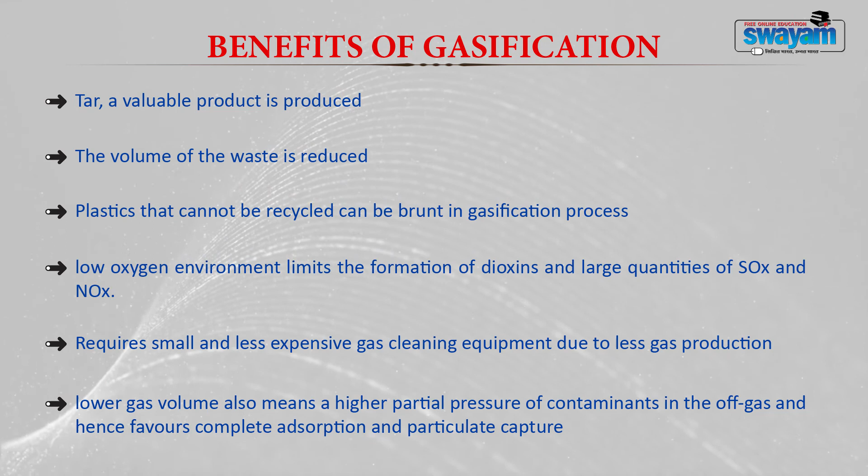The volume of waste is also reduced. Plastics that cannot be recycled can be burnt in a gasification process. The low oxygen environment within the gasification unit limits the formation of dioxins and large quantities of SOx and NOx. Also, they require small and less expensive gas cleaning equipment due to less gas production. Lower gas volume also means a high partial pressure of contaminants in the off gas, favoring complete adsorption and particulate capture.

Now, the disadvantages of the gasification process: tar, heavy metal, halogens and alkaline compounds released in the gas often cause environmental and operational problems. Tar produced during the process is a high molecular weight organic gas. It has the potential to destroy sulfur removal systems and ceramic filters, and it also leads to the formation of slag in boilers and on the refractory surfaces of the gasifier.

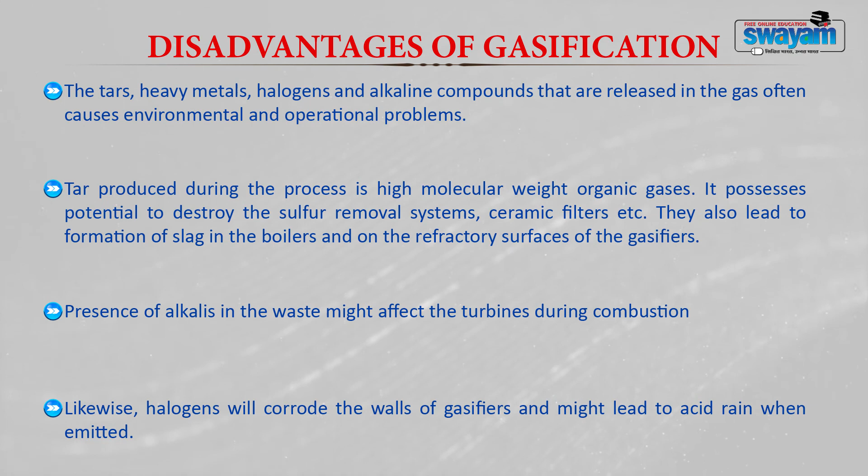The presence of alkali in the waste will affect the turbines during combustion. Likewise, the halogens will corrode the walls of the gasifying unit.

At the end of this module, we have studied about what is an advanced thermal treatment process. We have discussed the concept of pyrolysis and gasification. We have also understood the process description and mechanism involved in pyrolysis and gasification for waste breakdown. We also saw the characteristics and significant application of the various products produced during pyrolysis and gasification.

Then we discussed the different types of pyrolysis and gasification processes, and we also studied the different reactors used in pyrolysis and gasification. Lastly, we discussed the various merits and demerits associated with pyrolysis and gasification. I hope you would have enjoyed this module. Thank you.